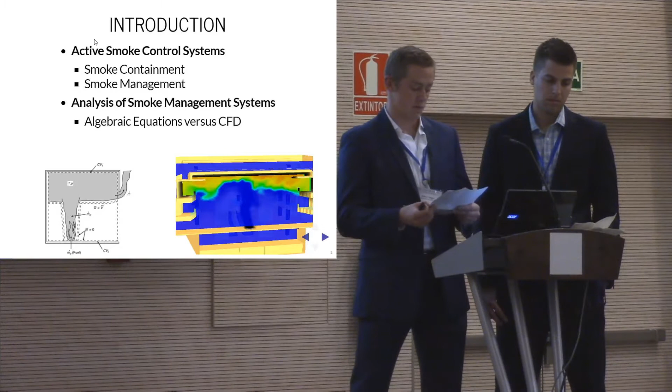However, visibility did not vary with time, and we found that lower visibility criteria could be used for atypical scenarios. We also found that similar visibility limits could be used for prisons and amusement parks. This was interesting because these are very different spaces with very different occupant characteristics and overall characteristics.

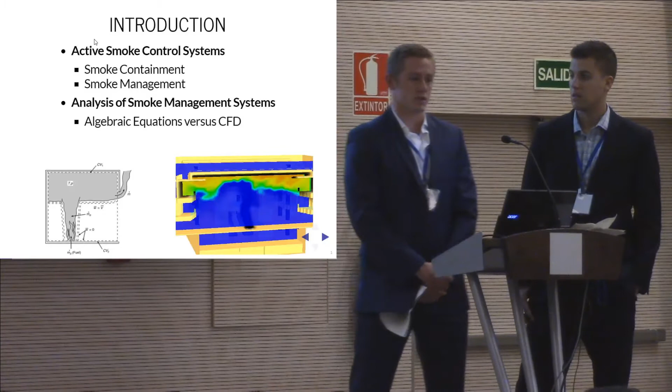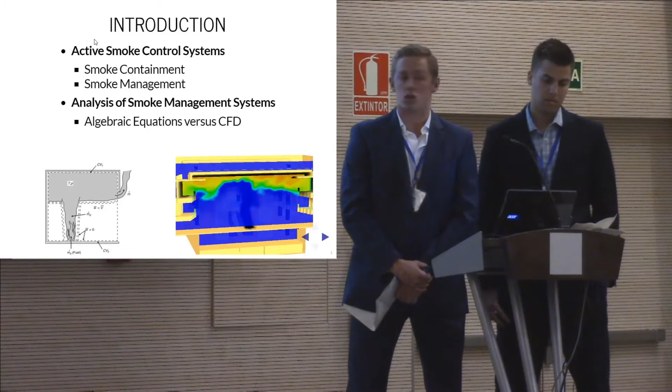In general, there's two main types of smoke control systems. There's smoke containment systems, which keep smoke in the area of origin and prevent it from going to an adjacent space. This includes pressurization or airflow methods. There's also smoke management systems, which move the smoke from the area of fire origin to a different space. And the smoke management systems were the systems that we looked at for prisons and enclosed amusement parks.

There's two different ways to analyze smoke management systems. That includes algebraic equations, which was the standard for a long time, with the upper and lower layers and the smoke interface height being maintained at a certain level above the highest occupied level. And there's also CFD analyses. Those allow a more detailed analysis.

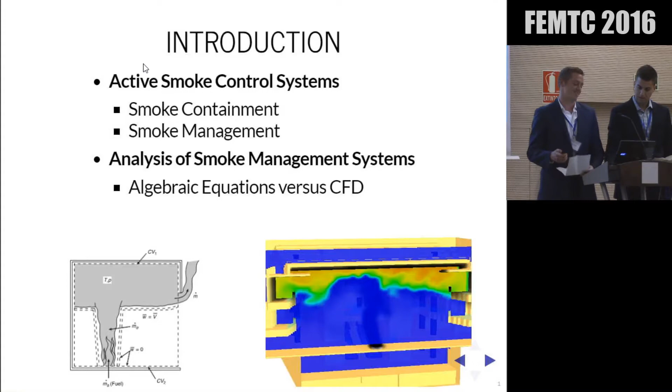Well, I have a clicker.

So we talked today about tenability criteria, and we need this tenability criteria in order to design an effective smoke control system. In order to understand this, it's important to understand the evolution of smoke control. Smoke control started in 1881 after the Ring Theater fire in Vienna. During the late 1800s and early 1900s, there were a lot of theater fires with mass casualties. So this led to studying smoke control.

So the initial tenability criteria for the first smoke control system was to put vents above the stage just to allow smoke to vent if the stage caught on fire. The first successful use of that was in 1911 when there was a stage fire and the smoke vents above the stage allowed all the occupants to escape.

So fast forward to today, we design our smoke control systems, as mentioned, with algebraic equations and CFD modeling, typically. In order to design an effective smoke control system, we need to determine the tenability criteria that we're going to use with these algebraic equations and CFD modeling. These tenability criteria are not black and white, and they're determined today using various guides and resources.

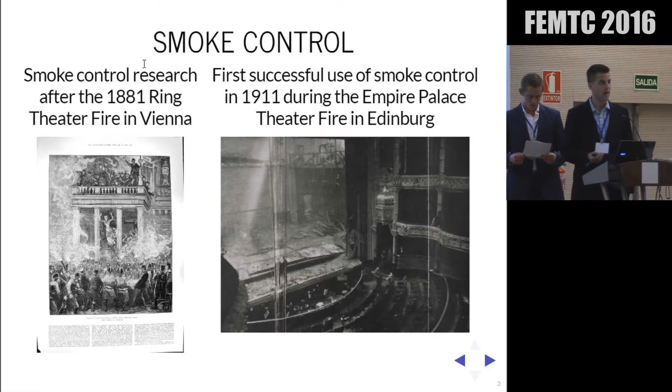Yeah, the most common guide that probably everyone's heard of is the SFPE Handbook of Fire Protection Engineering. It has a lot of broad data, and it's really up to the user to determine what should be used for their occupancy. The Handbook of Smoke Control Engineering is a little more specific, and that goes over CO limits and those kinds of tenability criteria that could be used in general. It also contains information that can be used for specific occupancies.

It suggests a visibility limit of 3 to 4 meters in someone's own home, 7 to 9 meters in a small atrium or university, or 12 to 14 meters for a museum with a complex design or a large atrium. And in all these cases, it's up to the engineer or designer to determine what's the applicable limit.

Then NFPA 130, which was touched on by Andrew, talks about tenability criteria for fixed guideway transit and passenger rail systems. The tenability criteria in that document are contained in an annex. NFPA 92, the standard for smoke control systems, is very well known for smoke control.

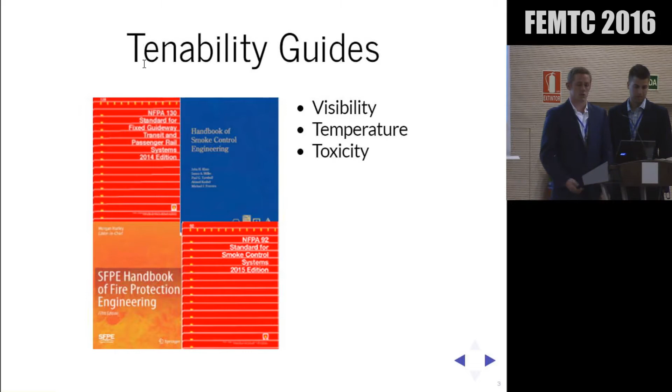It currently does not contain any tenability criteria. It's proposed to be added in future editions, though. So because we don't have any of these black and white tenability criteria, we take them from the sources that

Arthur mentioned. So we all know that temperature and toxic gases are the direct cause of death in fires, but visibility is an indirect cause, as it can trap occupants in the early stages of a fire by relatively thin smoke. The presence of this smoke obscures the light from windows, so occupants can't see as well, and they also can't see the light from the exit signs.

So data from the SFPE handbook, I don't know if it cuts it off a little bit, but they base this on different occupant characteristics and different building characteristics. For example, the SFPE handbook recommends for occupants who are unfamiliar with their surroundings, so us in this room, this might be our first time here, we don't know where all the exits are, a visibility of 13 meters.

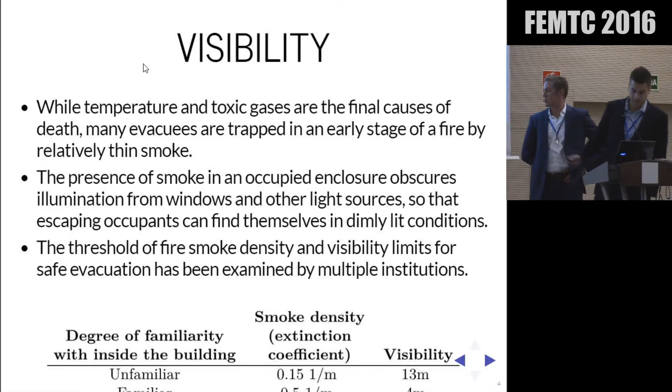For occupants who are familiar with their building, whether it be your apartment or a school you attend constantly, the visibility criteria, you can't really see it, says 4 meters right there. So the SFPE handbook also has guides based off of the building characteristics, so whether there's small enclosures and short travel distances or large enclosures with long travel distance.

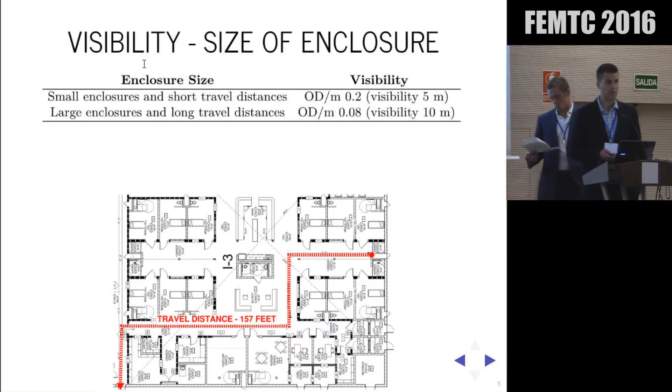So to determine the visibility based off of CFD analysis, you need to know your visibility proportionality constant. For reflecting signs, this constant is 3. For light emitting signs, this constant is 8. So your proportionality constant is directly proportional to your visibility. So the higher the number, the greater visibility.

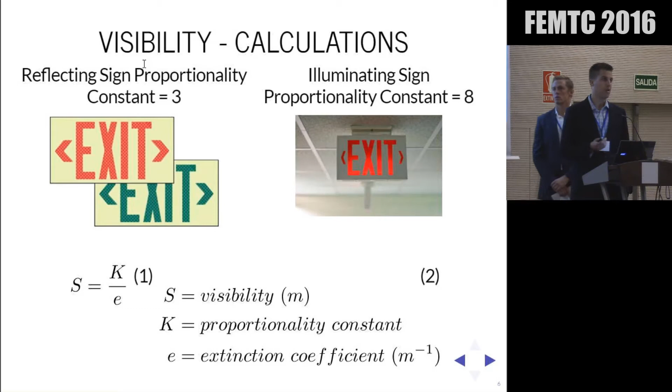It's important to note that even for prisons and amusement parks, if it doesn't require illuminated signs, you can provide those signs in order to reduce the effect that a smoke control system will have. So reduce the amount of CFM you need in order to see appropriately in that building.

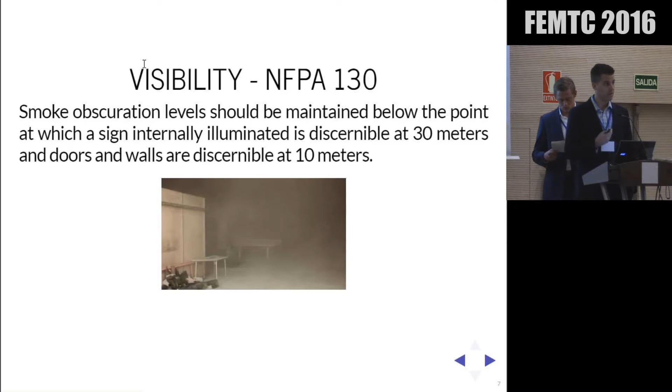As Arthur mentioned, there's only one standard right now that actually gives you set tenability criteria, and that's NFPA 130, which says a smoke obscuration level should be maintained below the point at which a sign internally illuminated is discernible at 30 meters, and doors and walls are discernible at 10 meters. As we mentioned, NFPA 130 is very specific, and it's not applicable to, say, normal atriums or, for the purpose of this presentation, prisons or amusement parks.

Another typical tenability criteria is temperature. Temperature can lead to incapacitation or death in fire victims in 3 ways: through hyperthermia, through body surface burns, or respiratory tract burns. Typically, respiratory tract burns do not occur without body surface burns, and hyperthermia is most likely to happen before any of those. So that's the typical tenability criteria used for temperature.

The equation in the middle of the page is an equation that can be used to calculate hyperthermia, and you can see it's directly based on the exposure time. However, there are other factors that should be considered, such as the occupant's clothing and the air moisture content.

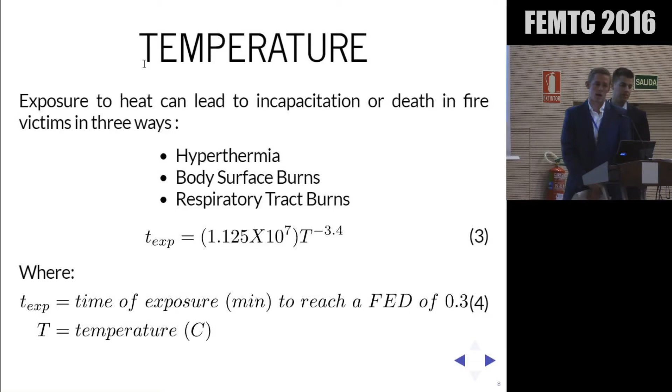In this graph, it can be seen that as exposure time increases, at the bottom, the temperature which will cause hyperthermia decreases. Also, with dry air, which is the upper line, you can be exposed to a higher temperature before hyperthermia is reached versus humid air. But because of sprinkler activation, we have always used humid air when considering exposure temperature.

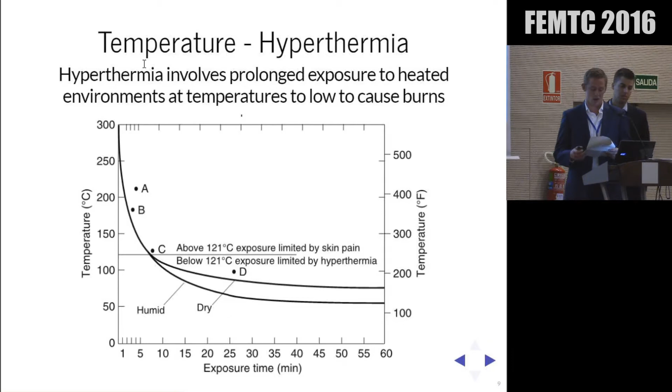This right here is a table taken from NFPA 130 for maximum exposure time before reaching hyperthermia. This includes a specific FED level and other safety factors in it. One thing to note for NFPA 130, there are some considerations such as not considering the effect of radiation. If someone's secured in a prison or in a secured amusement ride, they could have a higher chance of being exposed to radiation because they possibly won't be able to move away from that fire.

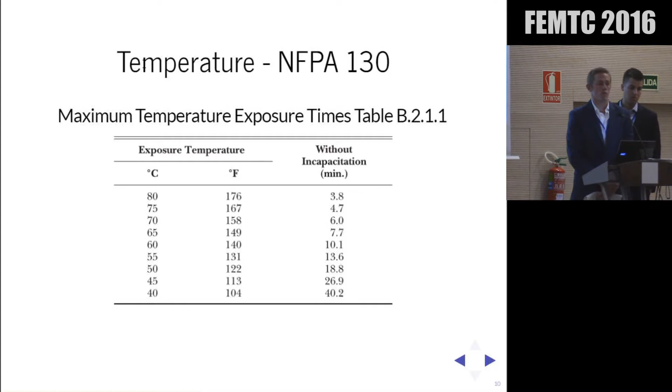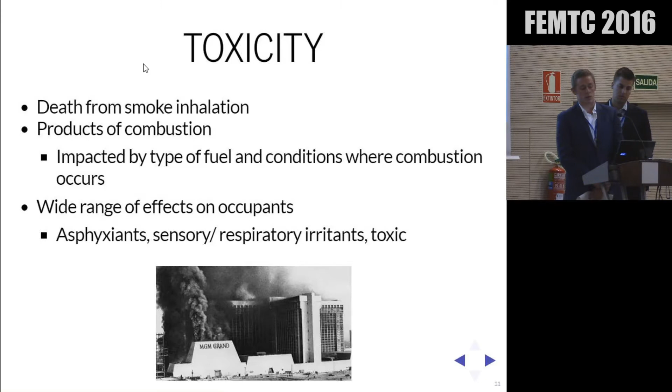The last typical tenability criteria is toxicity. Smoke is the most lethal part of a fire, and most deaths in a fire come from inhalation. There are a lot of different products of combustion. This is impacted by the type of fuel and where the combustion occurs. There's also a wide range of effects to occupants because the different gases can be asphyxiants, sensory or respiratory irritants, and toxic gases.

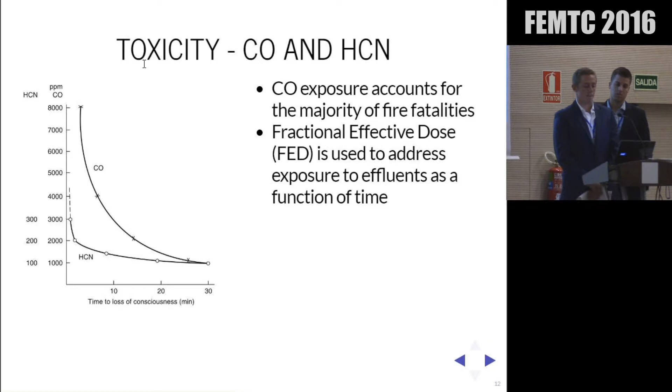Regardless, the effect that these two gases have on occupants and their combined effect can be calculated through an FED, or the fractional effective dose. Up top, briefly, there's a basic equation for FED. This equation right here can be used to calculate the FED for exposure to carbon monoxide and HCN. Typically, when tenability is being maintained, it's to some certain level for visibility, carbon monoxide concentration, or temperature.

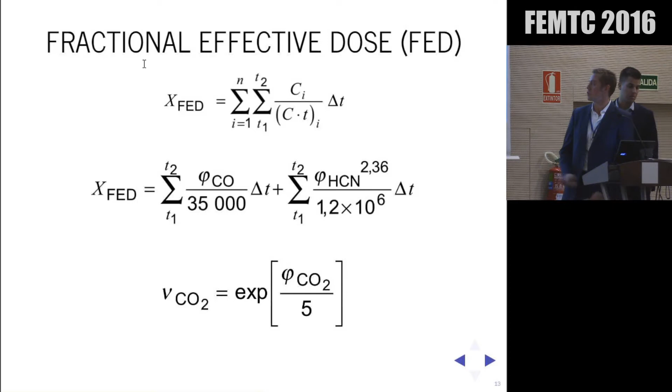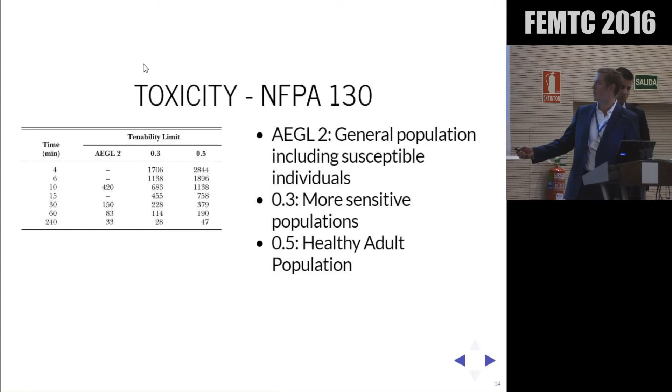CO2 won't be at a high enough level to have direct effects. However, CO2 can create induced hyperventilation. An equation to account for CO2 induced hyperventilation is on the bottom of the slide. NFPA 130, in its annex, solely takes CO into account for its tenability criteria. This is a table from NFPA 130. You can see that there's a couple different values to be used for CO concentration.

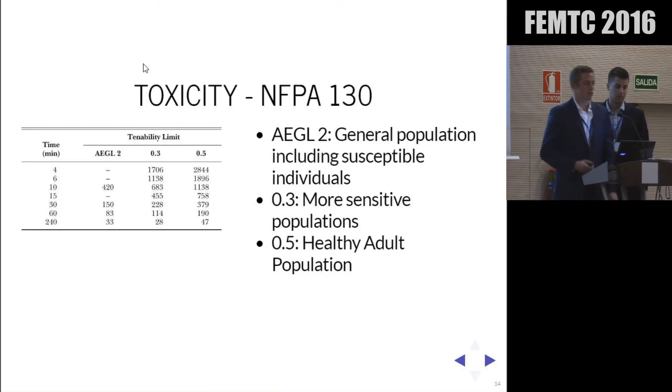There's AEGL-2, which is used for the general population, but it's more focused on including susceptible individuals. Then there's an FED of 0.3 or 0.5. These can be used for the more general population, with an FED of 0.3 being used for a more susceptible, more sensitive population, and 0.5 being used for primarily healthy adults.

So, through all this, we looked into tenability criteria with the main goal of looking at prisons and enclosed amusement rides, because these are atypical areas. Smoke control has been required by the IBC in prisons for many code cycles. However, in 2009 there was a substantial switch. The 2009 IBC required that specific prison spaces be provided with tenable conditions for exiting during a fire. This was a significant change because previous code editions would allow a pressurization system, which was much easier to design.

Prisons are unique spaces because they're very different from atriums, airports, or other large occupancies. As Gary said earlier, they're smaller, with shorter travel distances and smaller rooms. They're also spaces with controlled items. The amount of combustibles and where those combustibles are is very controlled by the guards and the staff in the prisons.

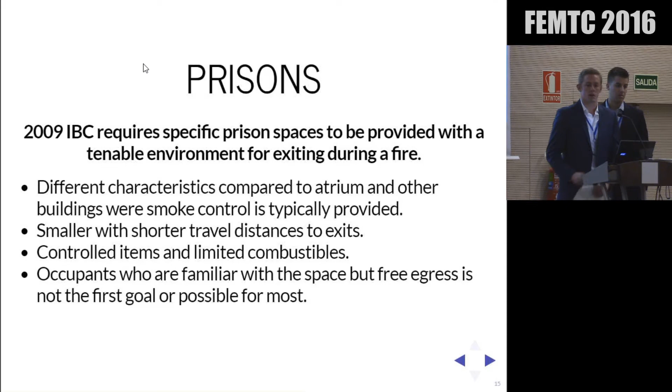Also, the occupants are very different. Prisons are mainly comprised of guards and prisoners. That's the general population in the spaces that are required to be provided with tenability. In a fire, the prisoners are typically not allowed free egress. And the guards' main goal during a fire is not to egress; their first objective is to assist prisoners in egress. So that's a substantial difference from normal spaces.

As we said, there are a number of different prison layouts. This is one we worked on, and you can see this is a larger prison space. However, it's only 2 stories. There's a day room right here, and then cells around it. This is a kind of mezzanine level with cells, and there's a lower level with cells. These are the same layouts, except they're separated into segregation units.

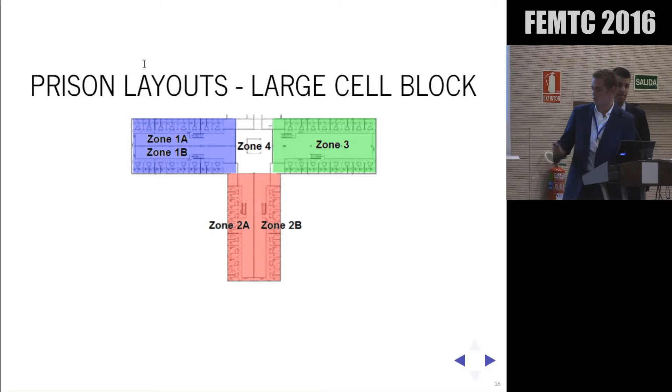What's interesting is, although these are smaller units, they take significantly longer to evacuate. That's something to definitely take into consideration for anyone who follows the IBC, because the IBC recently changed to requiring 1.5 times the egress time or 20 minutes, whichever is less. So for tenability criteria such as temperature or toxicity, where the limits are very much based on duration, the approach or the possible results for these two zones could change.

These are two other prison layouts that we've worked on. This is a dormitory layout where it's a decent sized room and all the occupants can move freely through it. But what's different with that space is it's still about 100 feet to an exit. So the space is still not that large compared to an atrium or an airport.

This is one that we've seen a lot recently, and this is actually a medical building. So it's an I3 or a prison medical building. And this one was definitely more challenging because it had much smaller rooms where tenability was still required to be maintained. In this project, the gray areas are corridors, and we were required to maintain tenability in these corridors.

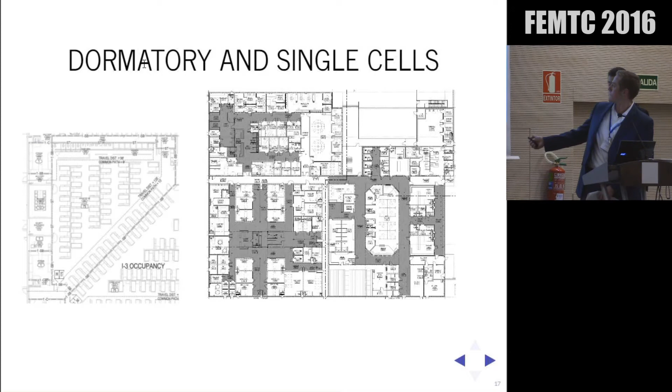And this is the one the next slides focus on. So in this scenario, we had to maintain tenability inside this corridor system. The design fire was located right here, and you can see right away, tenable conditions were lost in the immediate space. And that was acceptable, but the goal was to maintain tenability in the corridor system for exiting during a fire.

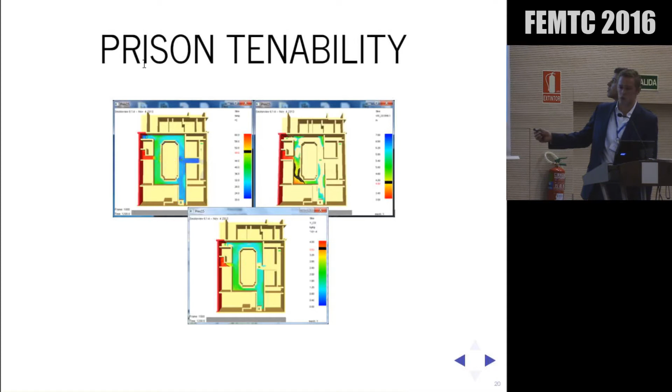This is 1200 seconds at the end of the scenario. These two pictures did switch. I realized that a little too late. But this is visibility, and visibility has been exceeded in this one small corner. The black line indicates where the limit's set. Despite that, CO concentration and temperature limits were still maintained.

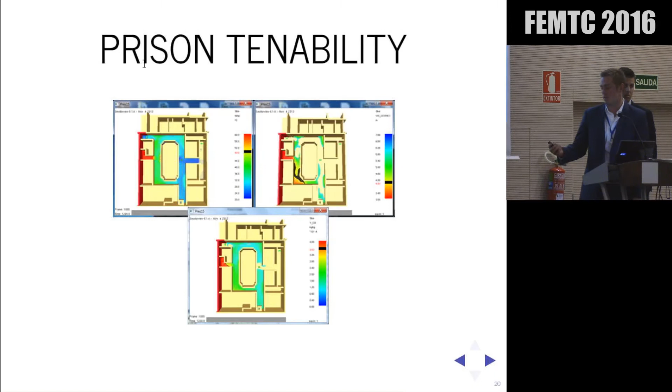So we talked with the AHJ about the limited failure and it being only in one corner, not the full corridor, with CO concentration and temperature being maintained. So this was deemed acceptable for this scenario.

So along with prisons, we've also worked on a lot of amusement parks, both in the United States and abroad over the last couple of years. And I heard earlier today, tenability criteria, 10 meters for visibility, I think is pretty widely used, as well as FED concentration of 0.3. Well, amusement parks pose a lot of very unique characteristics. Amusement parks in themselves don't require smoke control, but indoor or underground amusement parks typically have an atrium layout, which will require smoke control. But really, we're going to focus more on amusement park rides.

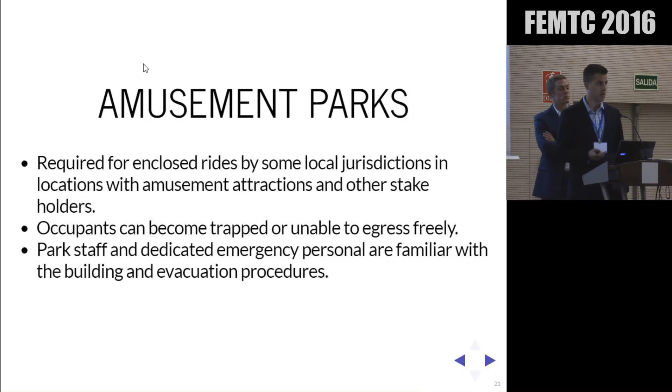So this is just a single-story dark ride in an amusement park. And while smoke control is not required by code, at least in the United States, it's typically required by the area or by stakeholders or local jurisdictions. So part of the unique parts of amusement parks is that you have occupants who are restrained in a ride vehicle who are not able to egress freely during an evacuation or during an emergency. Another unique aspect, from our project experience, is that the staff and nearby emergency personnel, so your nearby fire station or firefighters, are very familiar with the building and perform evacuation procedures at that building.

Like I said, the amusement park creates challenges for the smoke control system just based off the nature of their operation. You're putting occupants in restrained ride vehicles where they can't egress freely. So there needs to be evacuation plans. From our experience, there's typically 3 evacuation plans, and the primary evacuation method is to cycle out your ride. You're going to stop loading people onto your ride, cycle out that ride how it normally would, and then egress your occupants off that ride in a normal fashion. So you need a smoke control system that's designed to maintain tenability for these ride occupants for 1.5 times that calculated time.

Your second method is your manual evacuation. So typically your ride vehicles are going to have a manual release on them that needs to be activated by the staff. From our experience, the staff are trained in this evacuation procedure. They will go ride to ride and manually evacuate each person and walk them out of the building. So this can be much greater times than evacuation from a typical atrium, because you have to wait for somebody to come to you and take you out of that building.

The third evacuation procedure is a worst case scenario. While unlikely, it's a mechanical failure of a ride that puts the ride vehicle in an area or situation where the park staff can't get to it or can't evacuate those occupants. So emergency personnel need to come on the site, use emergency equipment, and evacuate these occupants.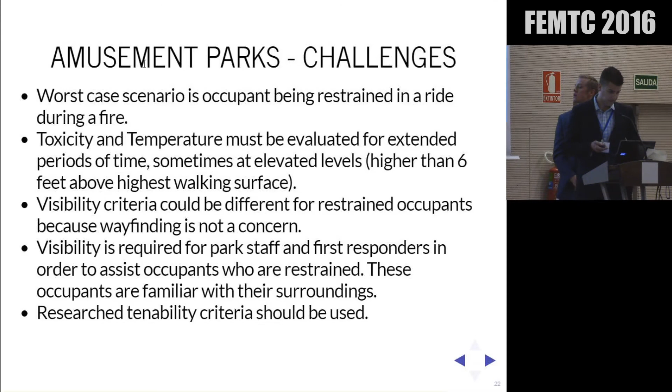Unfortunately, due to the nature of amusement parks, there's a lot of proprietary information, so I'm not able to show you guys the FDS slice files that I wanted to, but I can give you guys some of the data. So here we show, this is for a ride where the ride vehicle is at the ceiling of a dark ride, and occupants are trapped for a period of 45 minutes.

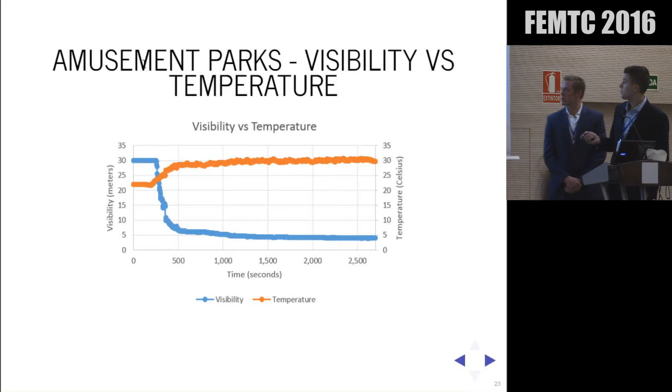You can see right here on the left is your visibility, which is your blue line. And you can see we get to below 4 and 5 meters of visibility. Now the orange line is your temperature, which gets to around 30 degrees Celsius.

As we pointed out earlier, for 45 minutes, the SFPE handbook and even NFPA 130 say that for 45 minutes, you need to maintain a temperature level of 40 degrees Celsius. So right here we show for 45 minutes, while our visibility does go to between 4 and 5 meters, we do maintain our temperature.

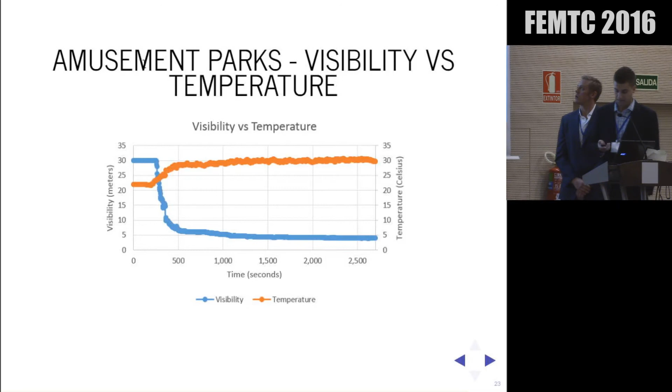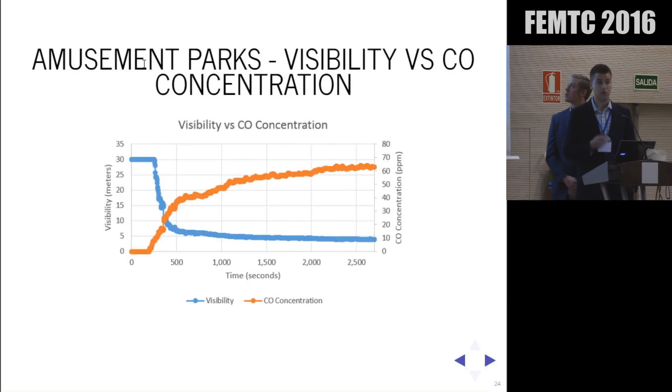Similar for CO concentration, as we said in the previous slides, the SFPE handbook references that for a 60-minute period, a CO concentration of less than 83 parts per million should be maintained. And this is for an AEGL-2 limit, which is even more conservative than your FED of 0.3. So here again, we show that we maintain that, while we are lower than that 10-meter visibility. We're at 4 to 5 meters of visibility.

So through our project experience with both prisons and amusement parks, we found that temperature and toxicity are based on exposure times. For prisons, you can have much shorter exposure times, and for amusement parks, you can have very, very long exposure times. But as probably most of you who do FDS modeling know, visibility is typically the first criteria to be lost during a performance-based analysis. From our project experience, a visibility of 4 to 5 meters has been used and accepted for both prisons and amusement parks.

So in conclusion, as your tenability criteria become more standardized, the NFPA 92 committee is working on standardizing your tenability criteria, which is great for our industry. But special attention needs to be paid to unique occupancies such as prisons and amusement parks, because these also have very unique tenability criteria. Questions?

Thank you very much. This is very nice, especially the case study part, but I would like to relate to the first part of the presentation when you were discussing tenability criteria and visibility, which intrigues me a lot, because visibility is, in my opinion, quite abused in fire protection engineering. First of all, the way we incorporate visibility in our studies is an implementation of the Beer-Lambert law, which is valid for a single monochromatic light source in uniform aerosol.